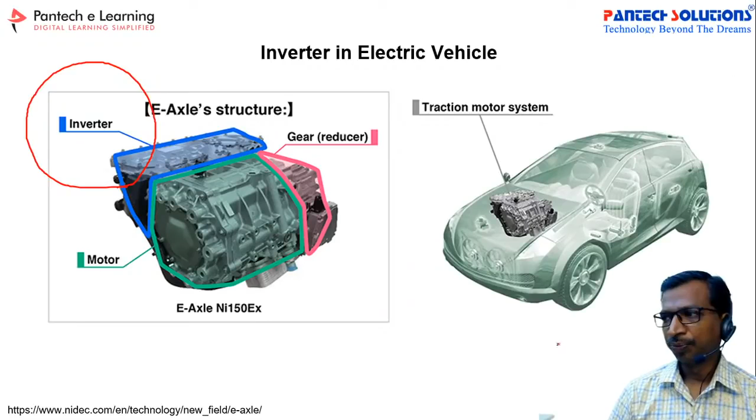Now let us move to the types. So what is an inverter? Do you have any idea about the answer? Inverter is a power electronic device to convert from DC to AC. Battery supply is a DC supply, and we need the output as AC, so that's why we use this DC to AC device - it's called an inverter.

For the inverter we will use MOSFET or IGBT devices. In this model, the entire circuit will use components like a MOSFET or IGBT.

So these two devices are the common devices which we are using in the inverter topology, and this is the ready-made device which is available on the market. Simply you can use it for conversion of DC to AC. If your input is 24 voltage DC and output is 230 voltage, then simply you can buy this inverter and use it. But as a researcher, you should know what is happening inside this device. So that is our main agenda of today's topic.

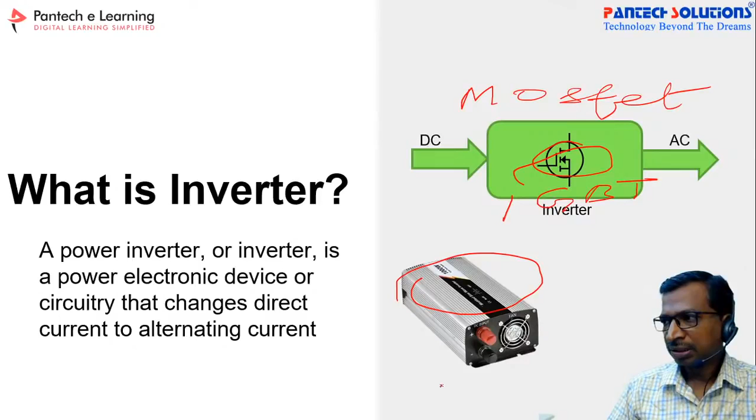Generally the logic will be programmed in a microcontroller. For this inverter, the main input we can call the DC bus voltage, which we get from the high power battery. The output, the desired voltage, is generated with the help of the microcontroller by the inverter module, and that voltage will be applied to the motor. So the motor will rotate under specific conditions. This is the main application of the inverter in our electric vehicle systems.

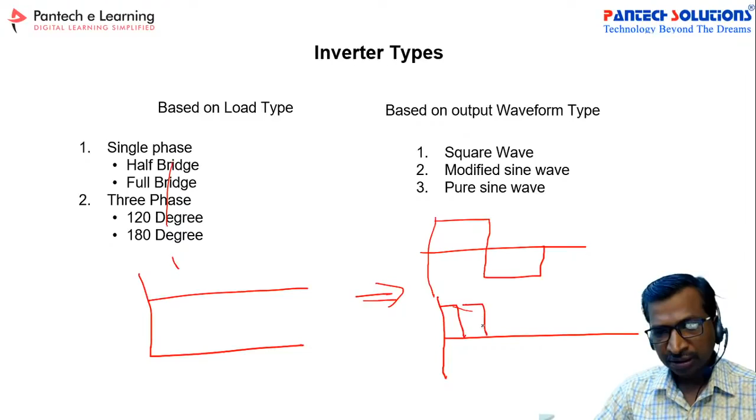So here we have to construct a sine pulse width modulated PWM model, converting from this square function. The pulse width will be based on the sine amplitude. Actually in the middle portion of the sine wave, the pulse width will be high, and for the corner side the pulse width will be very less. So like that we have to get the lower side, that is the negative portion also.

So like that we can get the output from the inverter model. For a pure sine wave inverter, based on the sine samples we have to generate a PWM. We will show you the demonstration in the MATLAB demo, how we can generate this one. So this is the generalized types of inverter.

So let us take a single phase full bridge inverter. This is the DC bus voltage. Simply we can connect a battery voltage with V battery plus terminal and negative terminal. And 4 MOSFETs have been used: T1, T2, T3, T4.

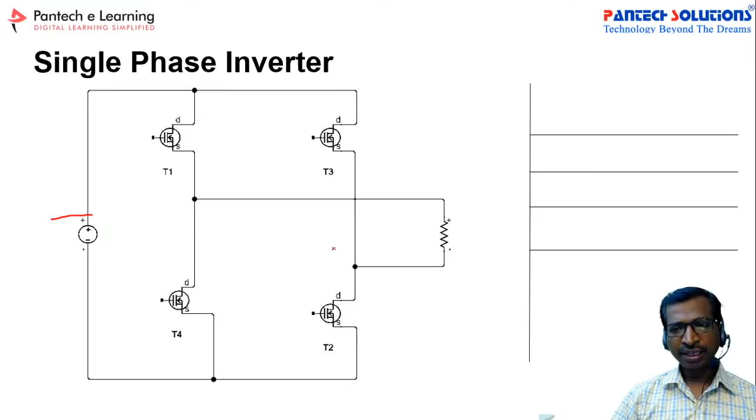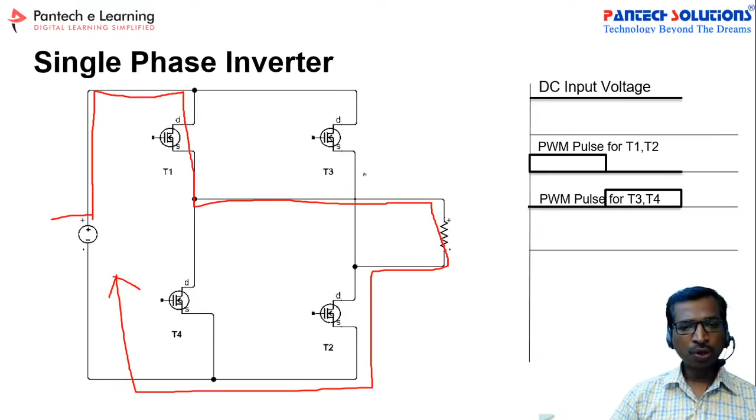The working principle of the inverter is, if you take the DC input voltage, we have to generate a PWM for T1 and T2 as a common pulse, and T3 and T4 as a common pulse. Suppose if you take T1 and T2, the battery voltage plus terminal is connected to T1 and the load, and T2 returns to the source. So this is one path, and the current flow may happen in this direction.

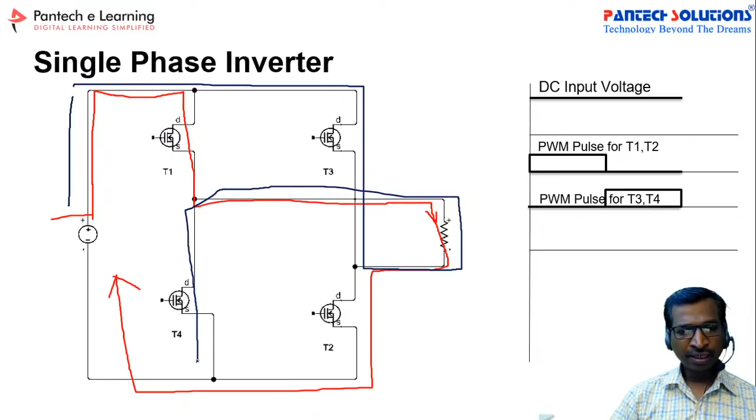Similarly, if you apply gate pulse for T3 and T4, the plus terminal will connect to the load via T3, and return to the negative via T4. So this is in the opposite direction. In that case there is no connection here. This terminal is connected to this limb, and this terminal is connected to this limb. So at this moment, the load voltage, see here the load voltage, this is V0.

So this V0 will always get a positive voltage for some time and then negative voltage for some time. See here, the output voltage will be like this. So even though we are applying a DC input, we can get a controlled output voltage of AC functions - positive voltage for some period and negative voltage for some period. This is the simplest working principle of the single phase inverter.

Now this is a three-phase inverter. To understand the working principle of the three-phase inverter, you must know what is the electrical degree, like 0 to 360 degree. In our AC voltage waveform analysis, we discussed what is 0 degree, what is 180 degree, and what is 360 degree. If you are clear about those degree conversions, then you can easily understand this concept too.

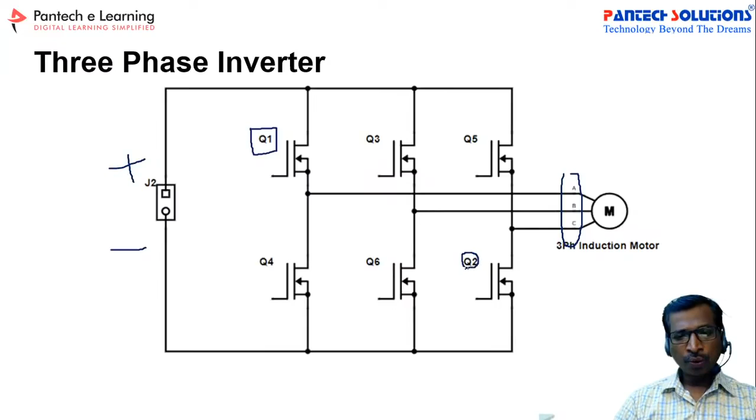If you take our inverter, the six switches are mentioned as Q1, Q2, Q3, Q4, Q5, Q6. See the numbering - if you have a clear idea about the numbering, you can easily understand the working principle of the inverter. So the first switch is Q1, the second switch is Q2, the third switch is Q3, and the fourth switch is Q4, which is for the bottom side of the A phase, and then Q5 and Q6. So we number it like this.

See here, if you take this one, you connect this one - so this is A phase, then B phase, then C phase. So just number it 1, 2, 3, 4, 5, and 6. This is the numbering of the MOSFETs or IGBTs, whatever it may be. If you give this numbering, then you can easily understand the working principle of the inverter. Just keep this in mind - this is the positive and the negative.

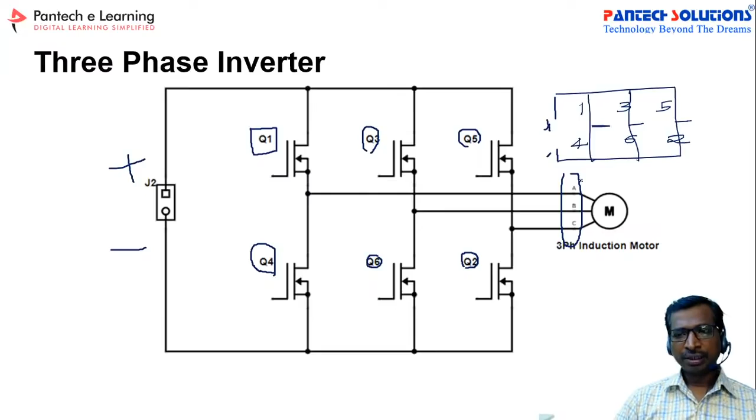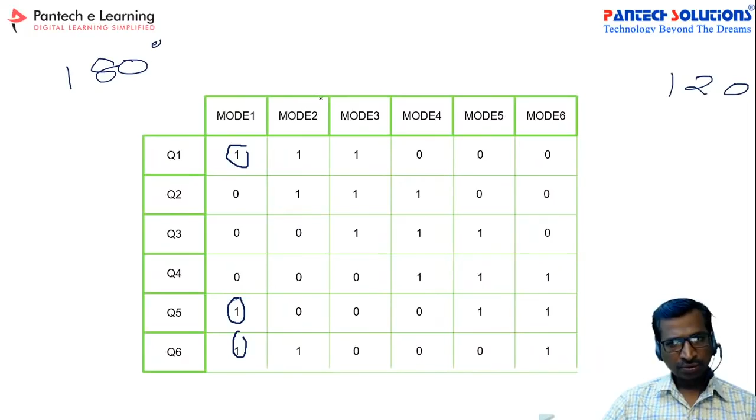Accordingly, during mode 1, Q1 we have to enable, Q5 we have to enable, and Q6 we have to enable. Since this is the 180-degree mode of conduction. For 120-degree mode, either we have to choose any two devices. In that case we have to remove the fifth one, and then turn on sixth and first. Let us consider only the 180-degree mode.

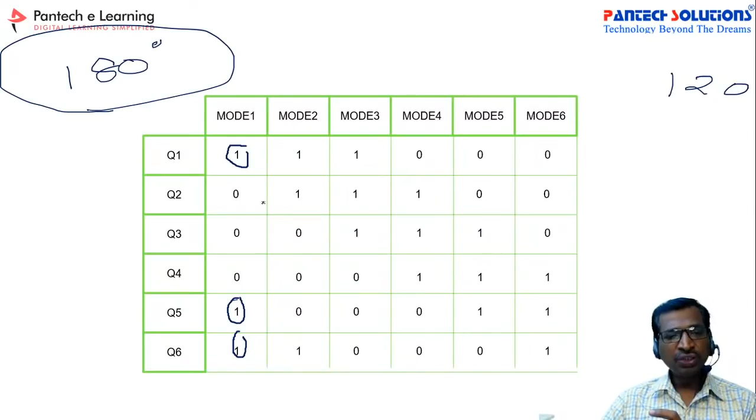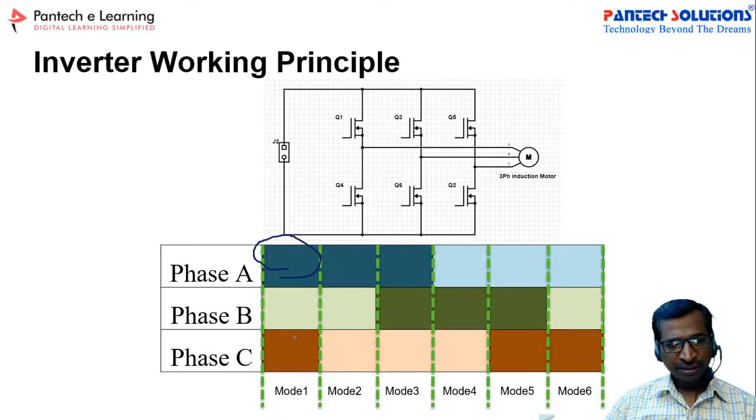If you generate this switching pattern, then you can easily achieve the desired output voltage. So now the point is how we can generate the switching pattern for each and every MOSFET. For that we have to use the pulse generator block to generate square pulses.

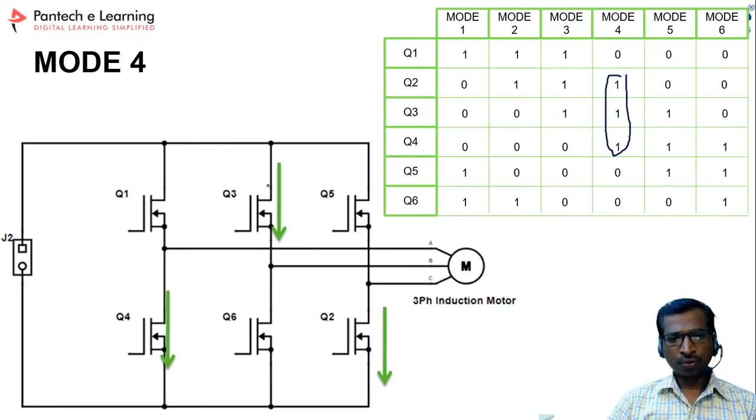In mode 2, switches 1, 2, and 6 will be turned on, and similarly mode 3, and for mode 4, switches 2, 3, 4. Like that we can turn on. If you generate this voltage, then we can get an output.

How will the voltage be calculated? For example, for mode 1 we are going to turn on 5, 6, and 1. So if you take this mode: first MOSFET, then sixth MOSFET, then fifth MOSFET. These three switches are going to be on the turn-on side.

See here, if you take this graph VDC, and Q1 and Q5 has been connected. Q1 resistance and Q5 resistance, and the negative voltage is connected to the individual resistance. All resistance is connected to the negative port, so this is the neutral point. This is VAN, and for Q5 this is VCN and this is VBN.

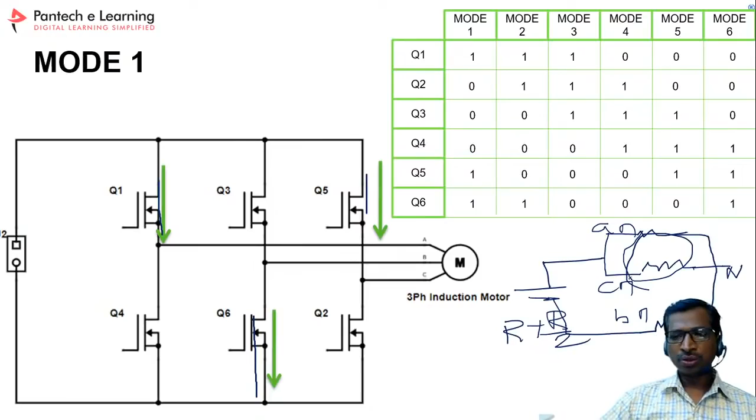So if you calculate this total resistance, the R equivalent will be R plus R by 2. If you sum these two resistances, then you may get R by 2, and this is the total R, equivalent R. If you sum this entire resistance, you can get the R equivalent value. Now you have to take calculations.

Just take this graph: here VAN, VBN, and VCN. Like that you have to calculate it. Here R plus R by 2, so 3R by 2 — this is the R equivalent. Now you have to calculate the current I1, so Vs divided by R equivalent, during this period 2Vs divided by 3R. Suppose if you calculate the voltage AN, to find the voltage between these two points, it is I1 into R divided by 2.

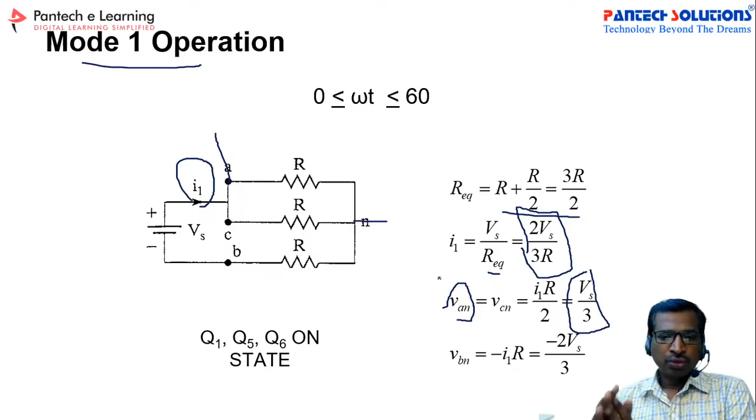So in that case, we know the I1 value is 2Vs divided by 3R, so this is called Vs by 3. Similarly, you have to calculate all these 6 intervals. If you apply this, you can get square pulses, so that will be the trapezoidal voltage.

So like this, you may get output voltage. Now the time is how we can generate this voltage. So let us move to the MATLAB.

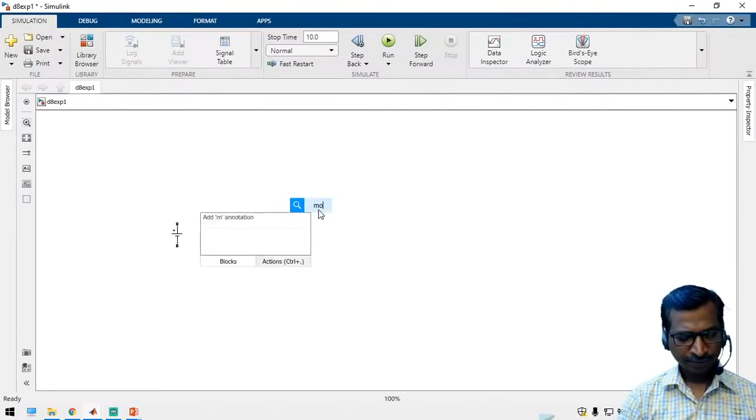Now take a MOSFET, and remove the measurement block for simplicity purpose. Remove the measurement block, rotate the component. For rotating the component, take control R.

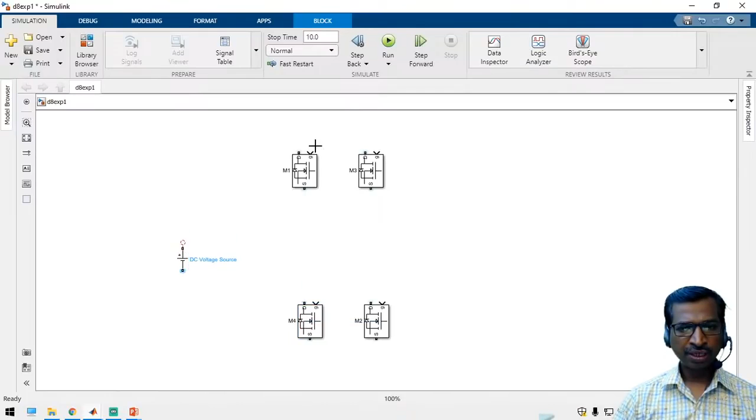So this is MOSFET 1, let us name it, and this is MOSFET 2, and this is MOSFET 3 and MOSFET 4. So this is the 4 MOSFETs we are going to use in our circuit. Just connect them as per the circuit diagram.

Now we are going to connect a load. If you have a load value, suppose if you are going to design a 1 kVA inverter, in that case you can choose load, RLC series load. So just take a series load.

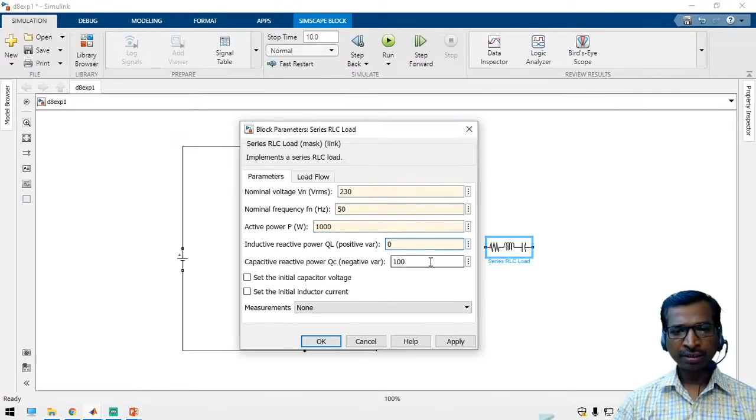Type the nominal voltage as 230 voltage, and the nominal frequency is about 50 hertz, and then active power here you can mention 1 kilowatt, like 1000 wattage, and then here you can apply the inductive and capacitive power. So just remove that one.

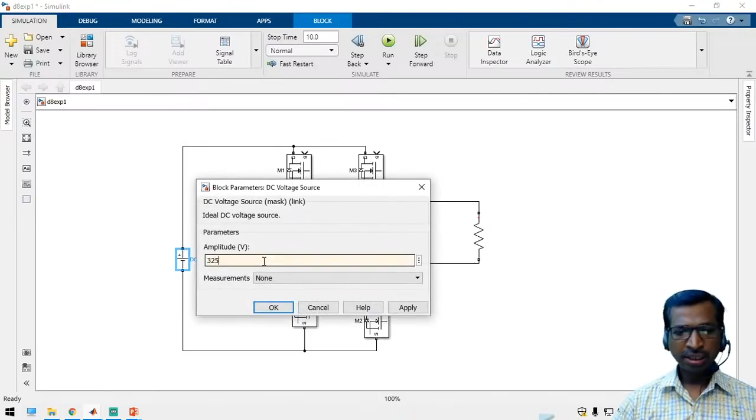So now we are going to power load our inverter for 1 kilowatt. Just apply 325 voltage as the DC bus voltage, or you can apply 350 voltage. Now we have to generate a pulse width modulation.

So take a pulse generator block, take a pulse generator block. See, the pulse generator is, see here.

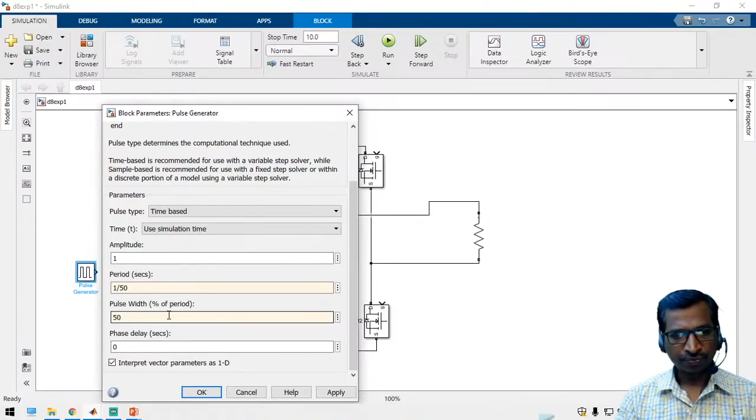So for the first pulse generator, set period to 1 by 50 seconds, and then 50 percentage. For the MOSFET's entire turn-on period you have to apply a pulse. Whenever you remove the pulse, the MOSFET immediately will get turned off. So this is the pulse for MOSFET 1 and 2.

So just take a goto function and let us connect pulse 1 and 2. So just connect here, pulse 1 and 2. Just connect here.

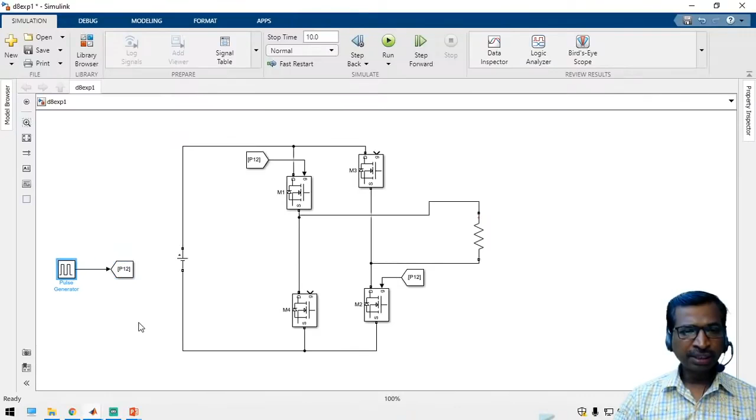The same pulse we are going to apply here, right? Similarly, you can invert the pulse and then apply it here. So just take a NOT gate, invert the same pulse and connect it here. So this is called P3 and 4.

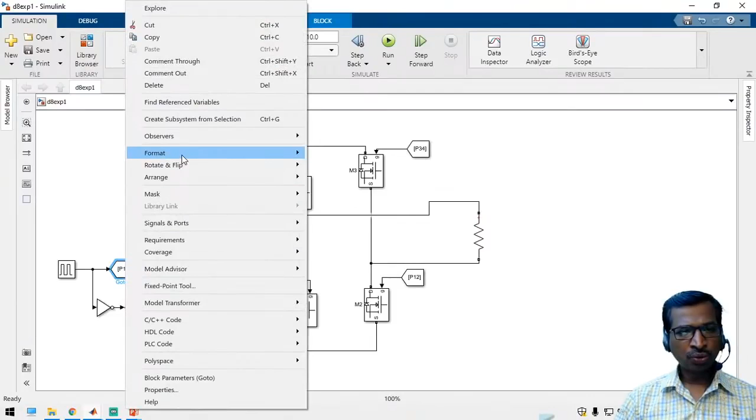Just save the simulation, and take the extract pulse. So this is the goto function, from function. Now I will show you the name also, the function name. I'm going to enable the name. For enabling or disabling the name, just go to format and then show block name. So now you can easily understand. So this is the goto function, this is the from function.

Yeah, so all are similar. So now this is the pulse generator block. Yes, this is the resistive load R0. So now we have connected everything, and we have to include the header file. So what is the name of the header file? Can you please comment in the comment box?

Practically, which component generates the PWM? A microcontroller is used to generate the pulse width modulation. See here, all the MOSFETs will connect according to that function.

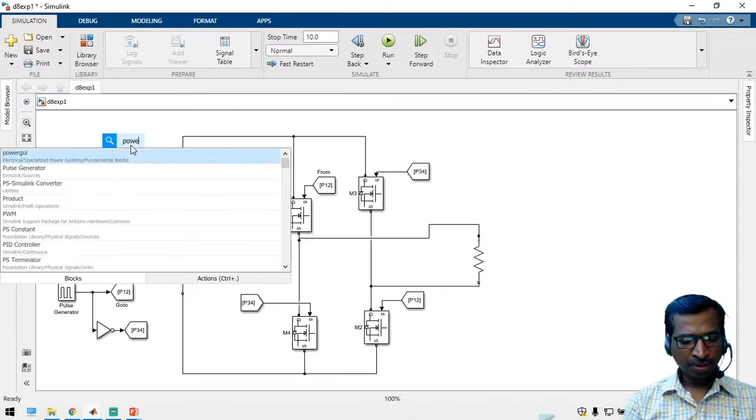Can you please comment what is the... yeah, correct, Mr. Sohim. Power GUI, we have to include it. So just search for power GUI. Just change from continuous to discrete to get accurate results.

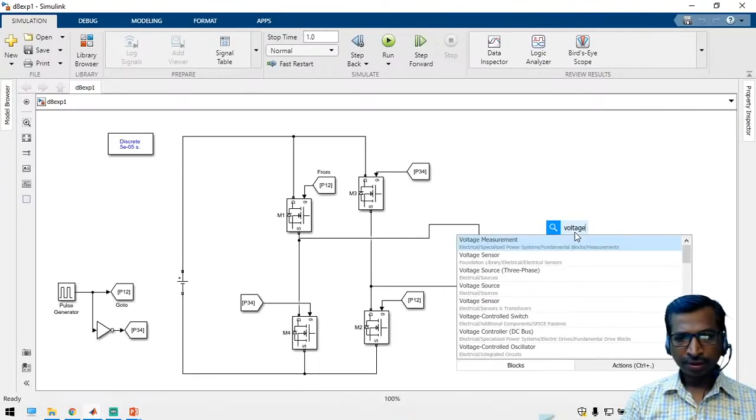So now we have to run the simulation for 1 second. And again we have to add the measurement block. So just take a scope, voltage measurement, connect across the load, and similarly you can also take a current measurement.

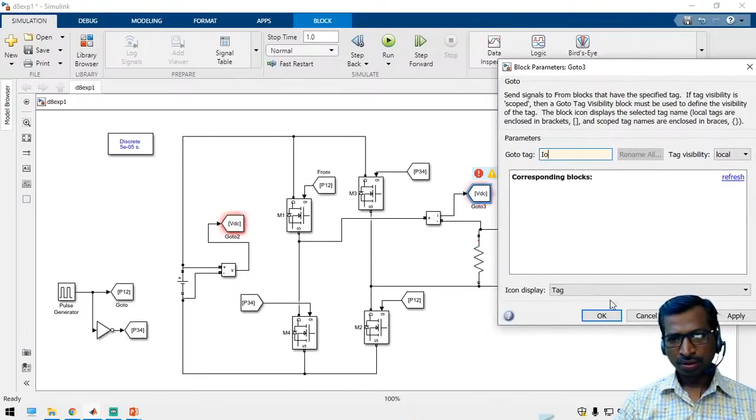And take a current measurement. Similarly, input voltage measurement also we have to take. So this is the input voltage measurement, and just take one more block. This is input VDC, VDC input, and I naught. This is I naught, and another one, this is V naught.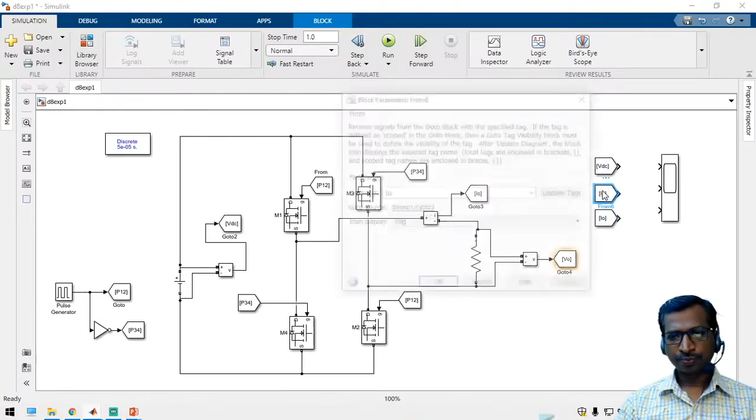So now everything we have connected. So take a scope block, make it 3 parameters we are going to measure. So just take a from block, first one VDC input, VDC, and this is I naught, and V naught also. So this is V naught. Like that we can connect, and now we are going to see the output of these 3 parameters.

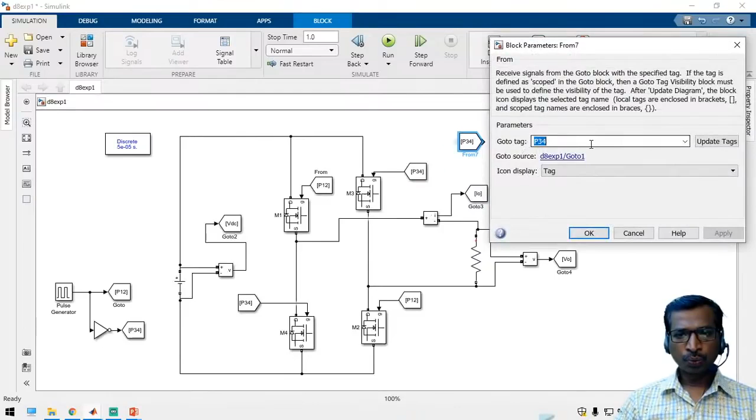And similarly we can connect, we have to measure the signals, that is the PWM signals also. See here, just take P1 and 2, P1 and 2, and P1 and 2. Okay, let us take another one, P3, 4, and V naught also. Just take another graph.

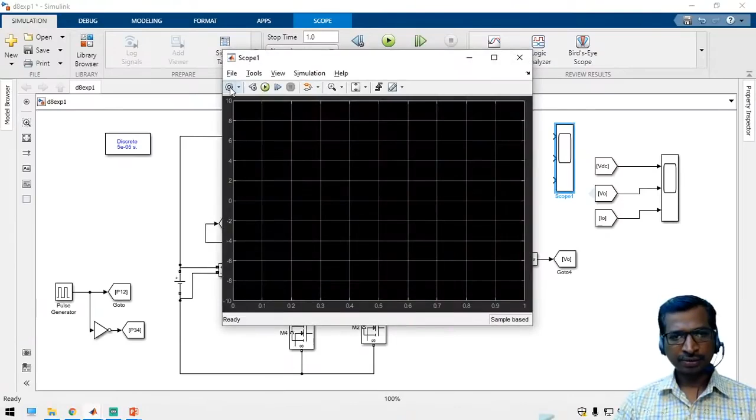So input voltage, pulse width modulation, and then output voltage. So here the input voltage, output voltage, and then current. So like that, if you analyze the graph, then you can easily understand the concept. So take a VDC input, VDC, 2 pulses, and then output voltage. So now we have configured all the block sets.

So now we have configured all the block sets, and just run the simulation. Let us wait and see how this turns out. Just run the simulation. Yeah, so it's initializing. Yeah, now it is over.

So now let us check the output. Open this graph, change the layout. See here, we are applying 0 to 325 voltage, sorry, this is the input voltage, called the input bus voltage, and this is the pulse width modulations. See the pulse width input: first pulse is for MOSFET 1 and 2, and the second pulse is for MOSFET 3 and 4, and we are deriving the second pulse from the first one, right? So this is the first one and this is the second one, and similarly we are getting the output: whenever the pulse is positive for 1 and 2, we get positive voltage, and when the pulse is positive for 3 and 4, we get negative voltage.

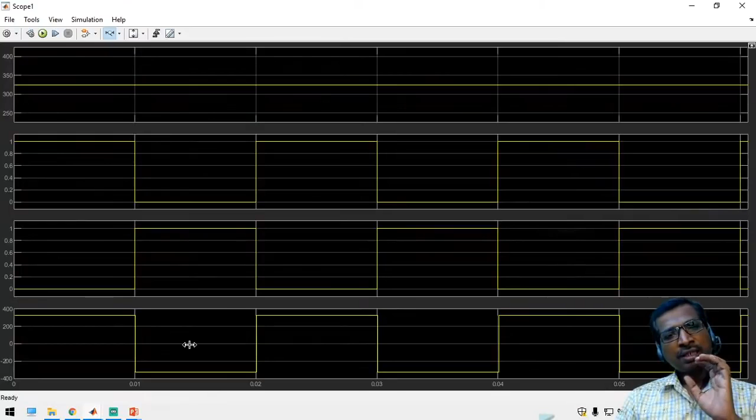So like this you have to construct a single phase inverter. And suppose if you know the sine pulse width modulation, just take a sine pulse, sine wave generator.

And take a repeating sequence, so that you can generate a triangular function. For the repeating sequence, assign time values 0, 0.25, 0.5, 0.75, and 1, divided into the time period. Or else you can keep it 5 kilohertz switching frequency, so 1 divided by 5 kilohertz.

And then the time period here is 0, 1, 0, minus 1, 0. Suppose if you want to understand this repeating sequence, please refer to the day one or day two class, detailed information is available there.

So the time period is assigned, and then the sine wave. So sine wave 2 star pi star 50 hertz. Other than this, no need to configure.

Change the solver procedure, change to fixed step. By default it will be variable step, so just keep it fixed step.

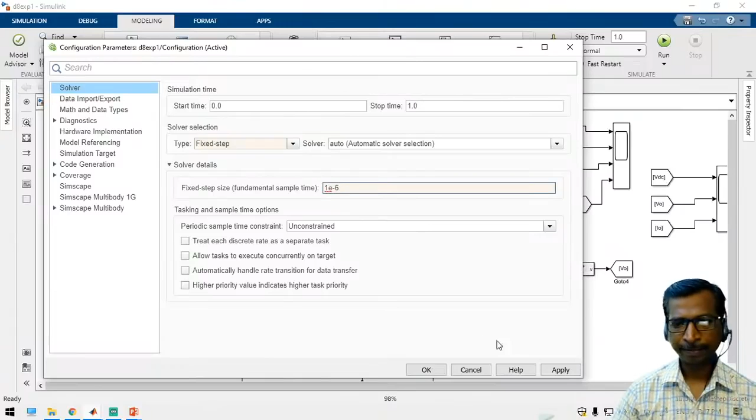Next you have to change the solver details. Open the solver details and modify to 1e power minus 6. If you apply this, you may get a proper sine waveform, otherwise the block will generate random signals.

So now we are going to connect. Take a relational operator to compare the value, connect it and change the logic. So just connect this one. Now you have developed the sine pulse width modulator.

Sine pulse width modulation. See here, the same output, but the output voltage will not be a square pulse, it will be a sine function.

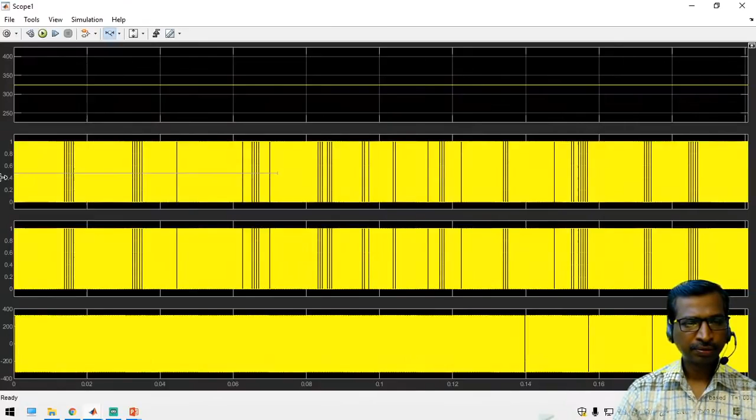Just increase the value, zoom the graph. See here the output, this is the output voltage. The output voltage will have a maximum pulse width, and similarly this is for the negative maximum pulse width. So like that we can change the firing angle.

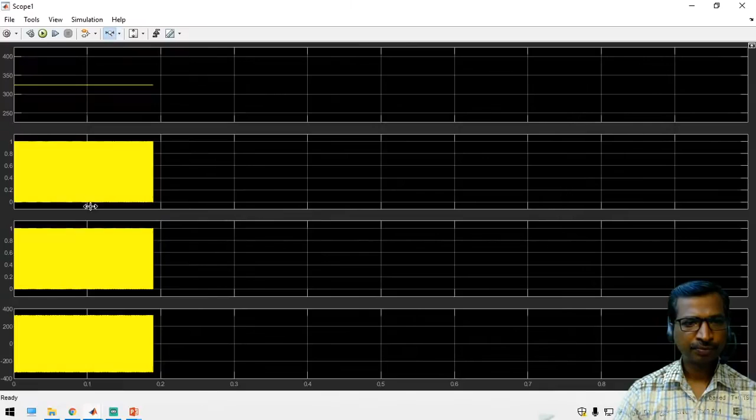See here, if you change the amplitude, instead of 0.1 you can keep it 0.8, then you can get more accuracy. Now you can get an easy view.

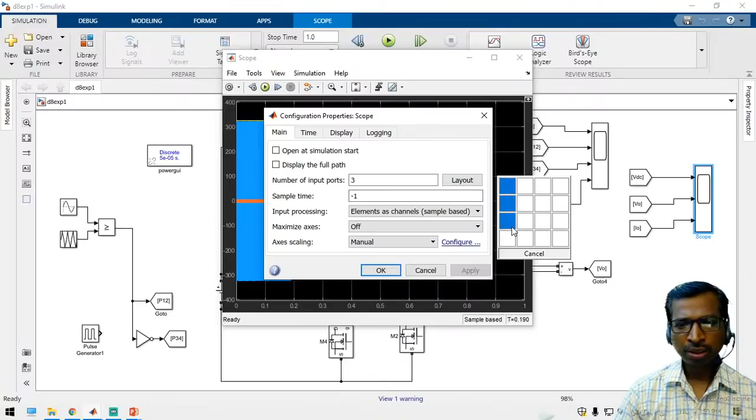See here, why we should use a sine pulse width modulation - let us take this graph, input and then output voltage, and then output current. See here, both are in the pulsed form.

Suppose since it's a resistive load, the current also shows that it rotates from positive to negative. But the average voltage, on the AC side, the RMS voltage will be a pure sine waveform.

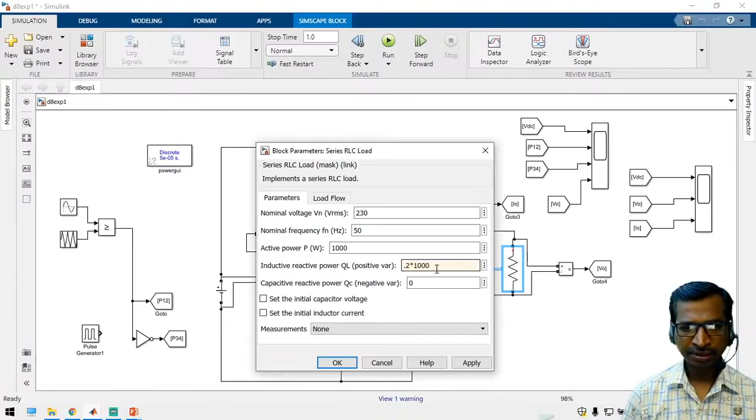Now if you increase the resistive load, generally the inductive reactive power will be maximum 20% of the active power. So in that case, 0.2 into 1000, this is called 20% of the active power. Just apply this inductive reactive power.

Now the situation is we have added the inductive load. See here, now the current waveform, this is the current function. By default this current function will move toward the sine function.

Since it's a sine pulse width modulation, we have to add a filter module to achieve a pure sine output voltage as well as sine output current. Without the filter, the voltage will not vary, but the current will get changed.

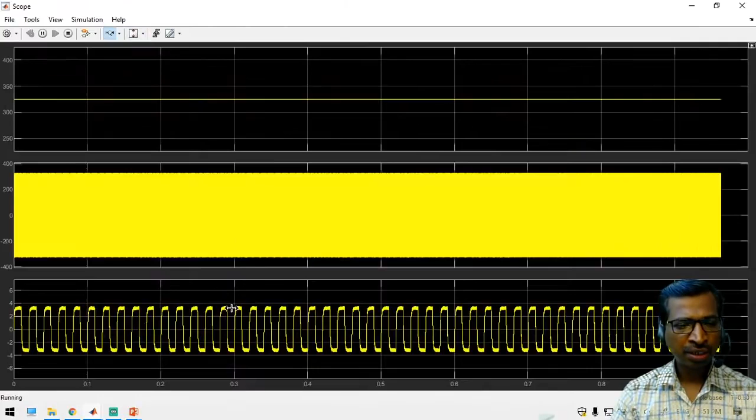See here, earlier the current was a pulsated waveform, but now the current waveform has been varied. So like this, the current function may vary, but in the square function you cannot get this. See here, this is the sine pulse width modulation.

Suppose if you are applying the square function, what will it be? If you are changing the pulse and analyzing the output current for the same scenario, see here the current function is more of a square waveform.

While you apply a sine pulse width modulation, it's somehow an improved one. If you calculate the firing angles for the filter models, to improve the sine function you have to add an EMI filter to achieve a pure sine output voltage and output current. Like that, you can implement a single phase sine pulse width modulation.

Similarly, we can generate a square pulse also, and we can develop a three-phase function also. So for the three-phase inverter, again we have to use the same logic. Let us check one by one.

Now we have to generate three functions, so just remove three phases. I'm going to change this one to three phase PWM. So remove this one and include another leg, another leg.

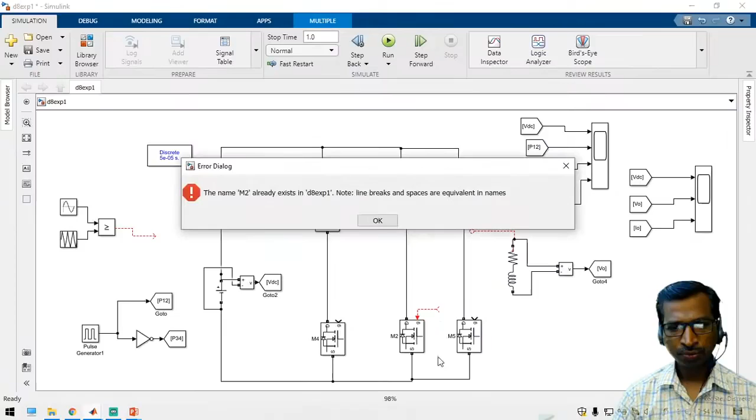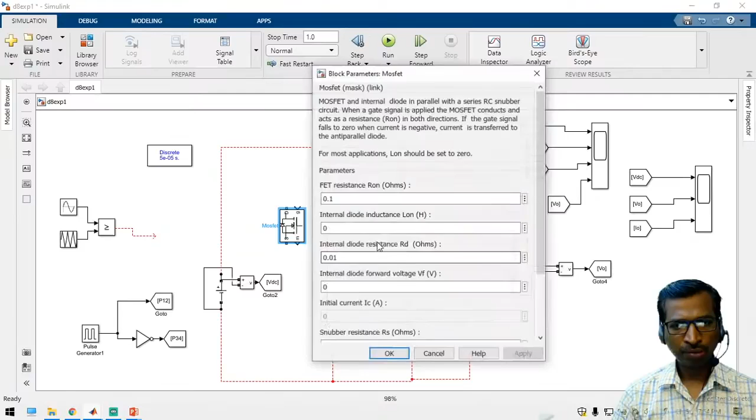Now we have to generate pulses. See here, M1, this is M2. Let us delete one and recreate it so we can easily develop a block. Take a MOSFET, rotate the component, remove the measurement port, and this is M1. So just connect accordingly.

MOSFET 1, and this is MOSFET 2, and MOSFET 3, MOSFET 4, and MOSFET 5, and MOSFET 6. Okay, so this is the switching pattern, the inverter structure. Now we have to generate square pulses, PWM pulses.

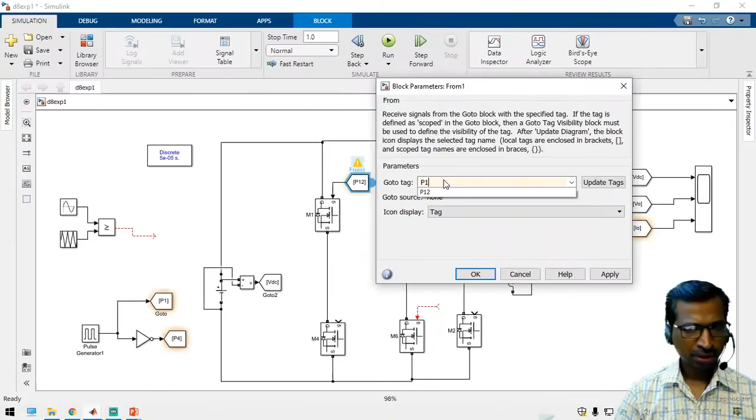See here, this is P1, and so this is P4 pulse. See here, so this is P1, M1, and then M2. For M1, the pulse is P1, and for M4, the pulse is P4. Now just take a from block, rotate it. So this is P1, and this is P4. The inverted pulse will be P4.

Similarly, now we have to generate a pulse for phase B. So let's take this as phase A, and let us generate phase B. For phase B, just copy the same one, and for phase B this is P3 and this is P6. Here this pulse should be 120 degrees apart from pulse 1, phase 1. So how can we generate 120 degrees? See, 120 into 1 divided by 50 divided by 360. This is the simple calculation to generate 120 degrees.

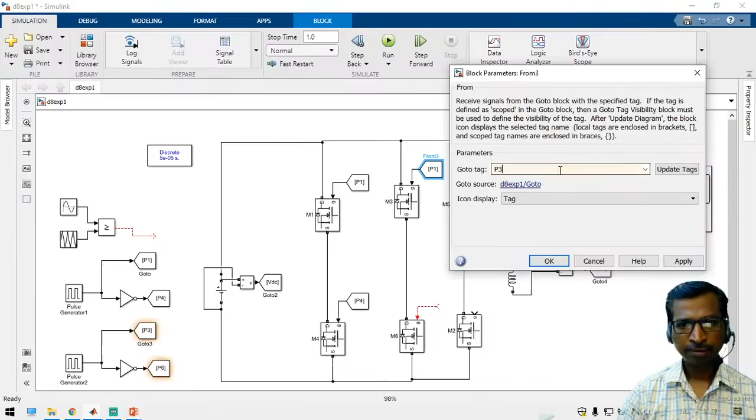And P3 and then P6. So just name the variables. This is P3, and P6. This is P6, right? And similarly we have to connect the load also.

Let us check one by one. Just remove it, rotate the component. Let us take a pure resistive, then we can go for the inductive. For A phase, take a B phase and C phase.

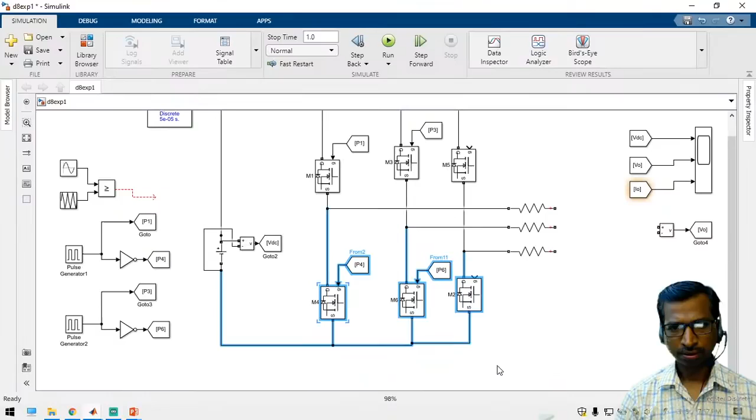So just take this one, and this is the neutral point. Okay, so this is the neutral point. Now we have to generate phase C also, and here we have to modify this one. This is 120 degrees and 240 degrees.

So C phase will be 240 from phase 1. Okay, so 240 from phase 1, and now you have to change it. This is the phase P5 and P2. And again just connect here, this is P5 and P2. So P2. Now all these 6 pulse width PWMs have been applied.

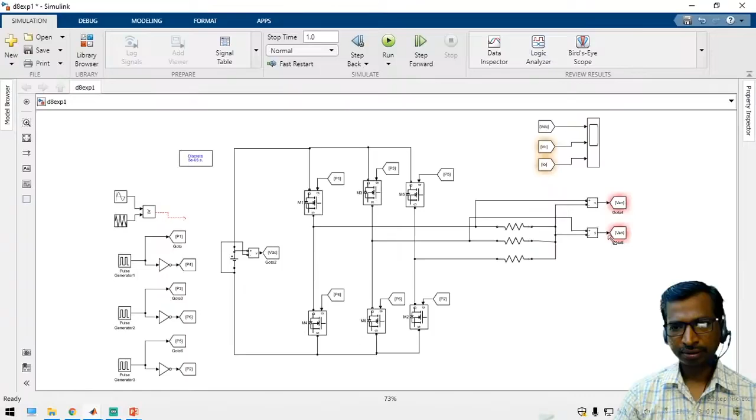Now we have to connect a voltage measurement block. So just change here. Now we are going to connect A phase and then neutral. Let us name it VAN. So this is VBN, VB voltage, and then neutral point. So this is VBN, and VCN. So VCN, this is C and then neutral point.

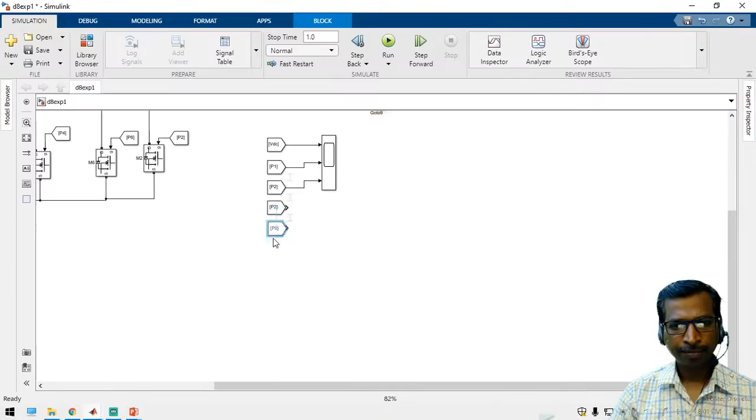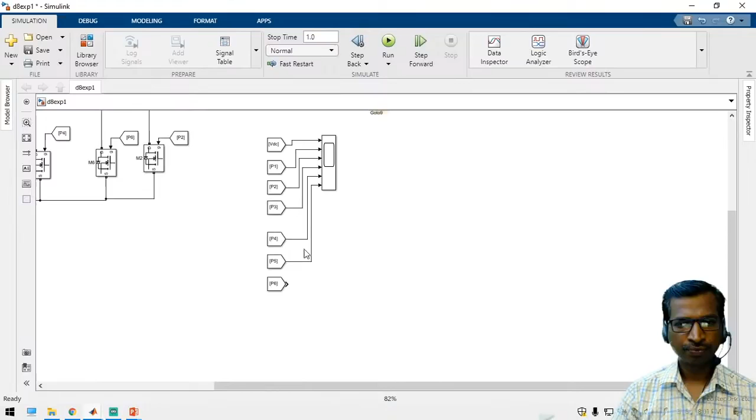Now we have to measure the pulses. So just take this one. Six pulses, let us check: P1, P1, and P2, P2, and P3, P4, P5, P6, P3, and P4, and P5, P5, and P6. P4, P4, 5, and 6. So let us take all the graphs.

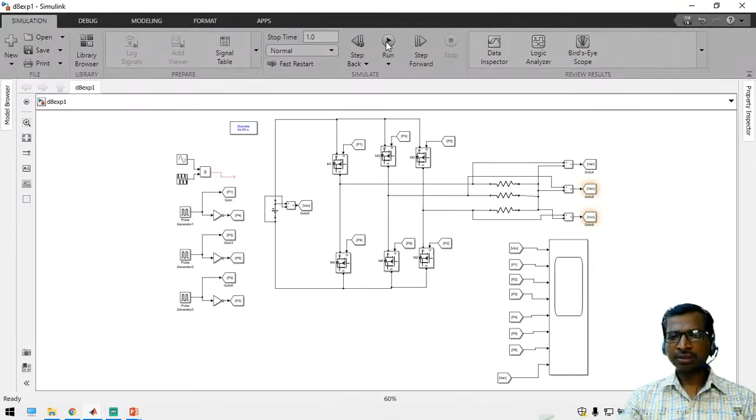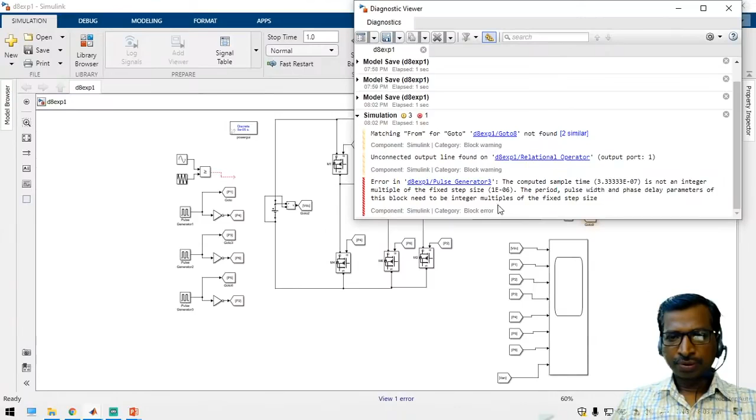Error, pulse generator block: sample time is not integer. Fixed step time, just to change the parameter. So just remove this block, and sometimes that previous header data will be stored in the data history, so just change it.

It's not an issue. If you clear the workspace data, then you can get it. So now we have run the simulation.

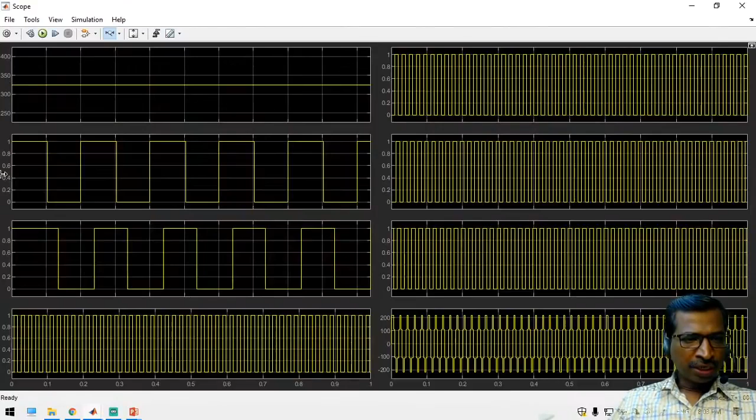See here, input voltage we have applied, and if you zoom the graph, each and every signal has been phase shifted by 60 degrees. This is the output voltage of VAN, and this is the PWM first pulse, then second pulse, then third pulse. From this, again it will be shifted by 60 degrees, and then again 60 degrees, and then again 60 degrees. If you combine all these things, each and every phase pulse will have a 60 degree phase difference.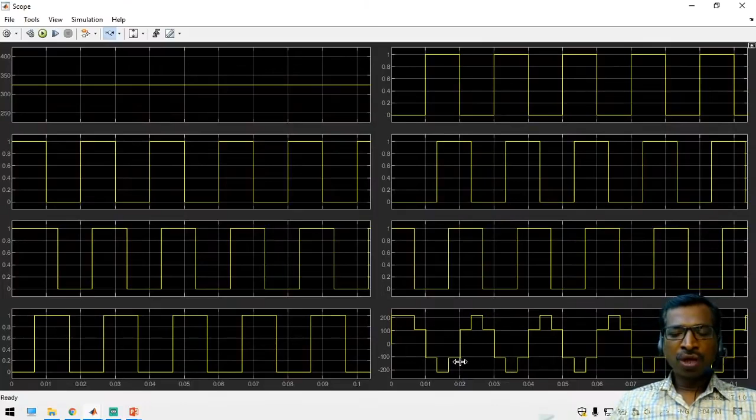So if you apply this, then you can generate a 180-degree mode of conduction inverter output voltage. Now we can take another graph, just remove this input and then output. Take input as well as output. So let us measure input voltage, input voltage, input voltage, and then output voltage.

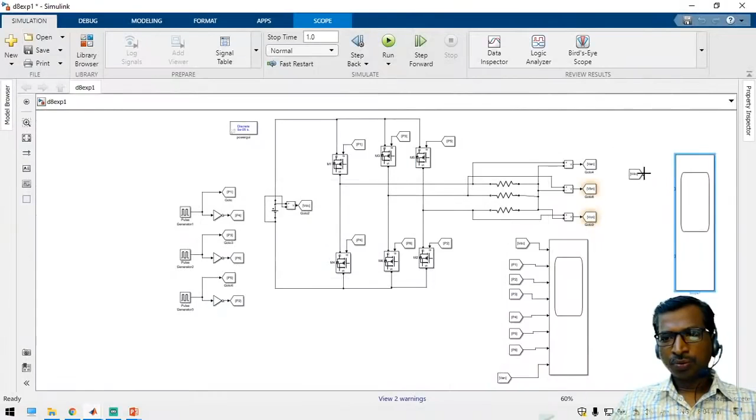So take a mux block to combine all these three inputs: V, VAN, VAN, VAN, and VBN, so that you can identify the phase displacement also. For the purpose, we have to use VBN and VCN. So this is VCN, just to connect, then now just run the simulation.

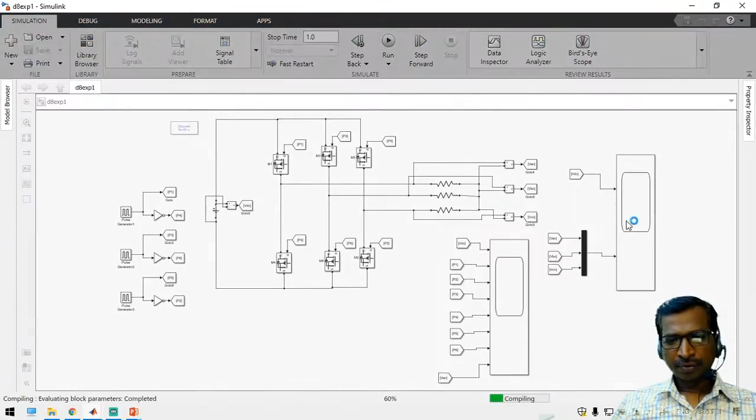See here, the input voltage as well as the output voltage. This is the phase shifted output voltage. So like this, we can generate signals. Is it clear? The three inverter output voltages have been generated. So this is 180-degree mode.

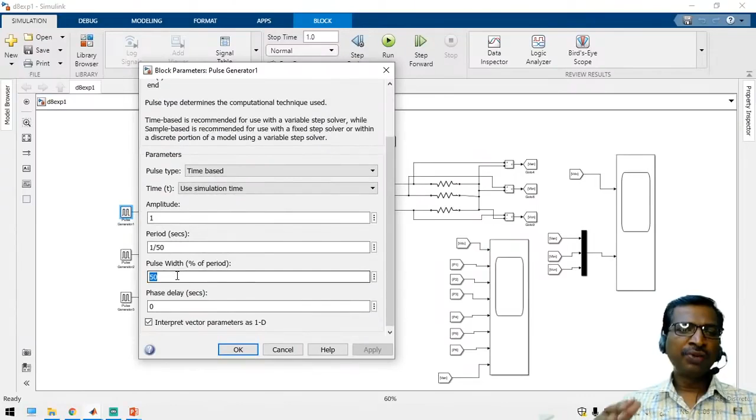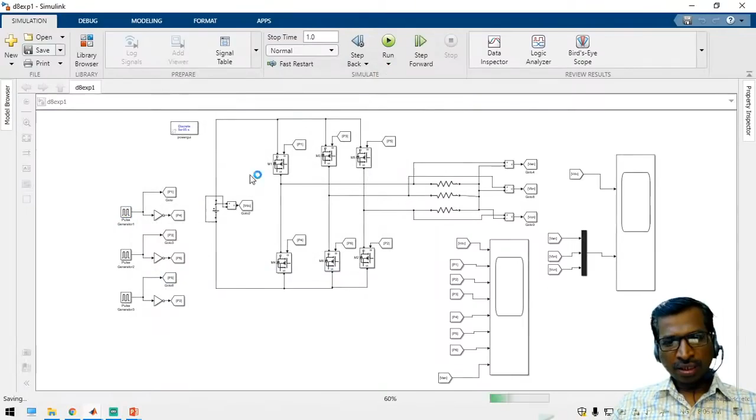I think you have understood the complete idea of the inverter pulse in three-phase inverter generation. So try to practice the same pattern and get the output. If you have any clarifications, you can comment in the comment box. Now you can get the output. Now you can ask your questions.

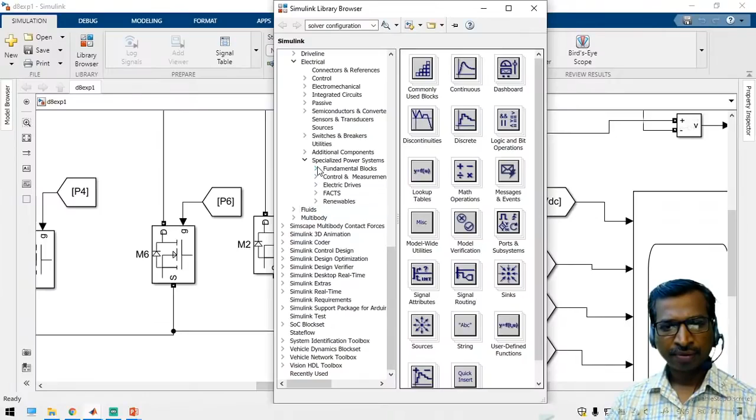MOSFET, you just search in the tool work area, you can get it. To identify the MOSFET, just go to MATLAB, open the library browser, go to Simscape, go to electrical, specialized power systems, and fundamental blocks, so power electronics. So here you can identify all the blocks.

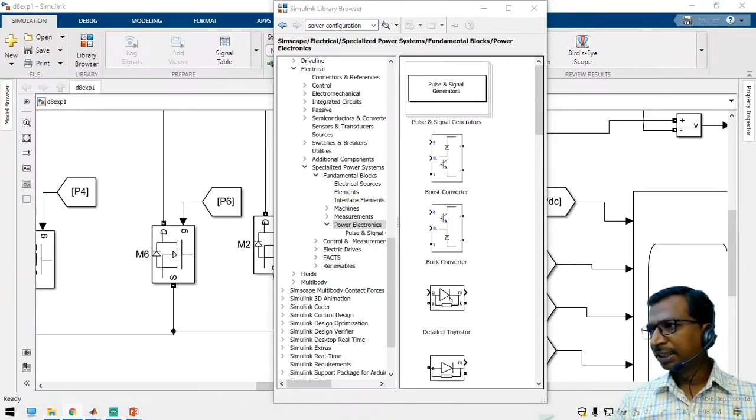Please tell 120-degree mode of conduction simulation. Actually, for the 120-degree mode of conduction, take this pulse 1, change to see here 120-degree mode, right? So 120 divided by 360 into 100%, this is the pulse width. And for P1 it's 0 degree, and for P2 calculate the same one, right?

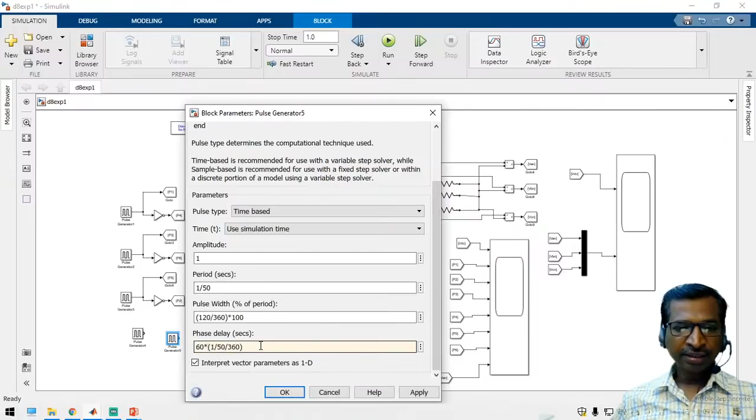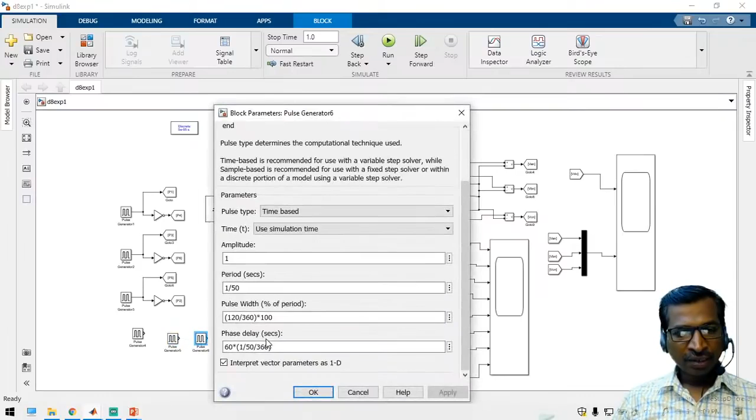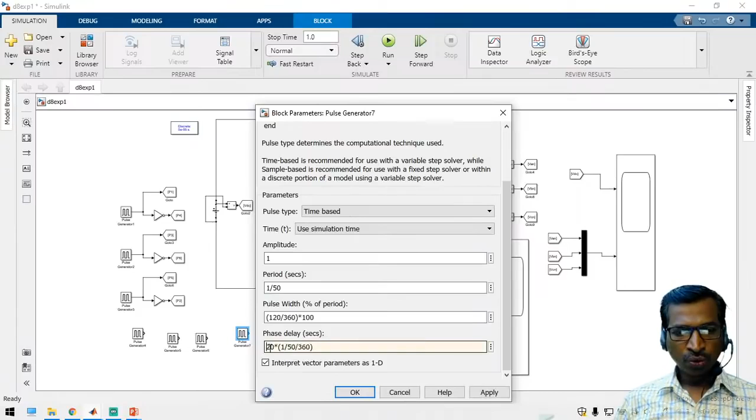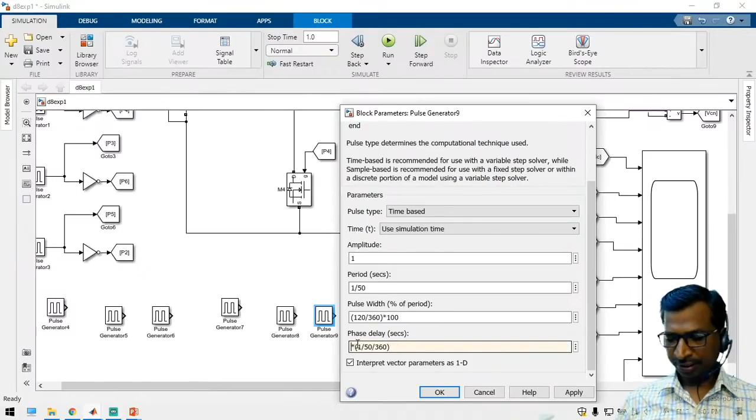So 1 divided by 50 divided by 360, this is the 1 degree time period, and 60 degree phase shift, 60 into the time value. So this is P1, sorry, P1 is 0 degree, P2 is 60 degree phase shift, and P3 here you have to apply 120 degree, and for P4 you have to apply plus additional 60, so 120 plus 60 is 180. And for P5, 180 plus 60 is 240, right? And P6, 240 plus 60 is 300. So like that you have to apply. So this is P1, P2, P3, P4, P5, P6. Simply you can apply, then you can generate a pulse width for the 120-degree mode.

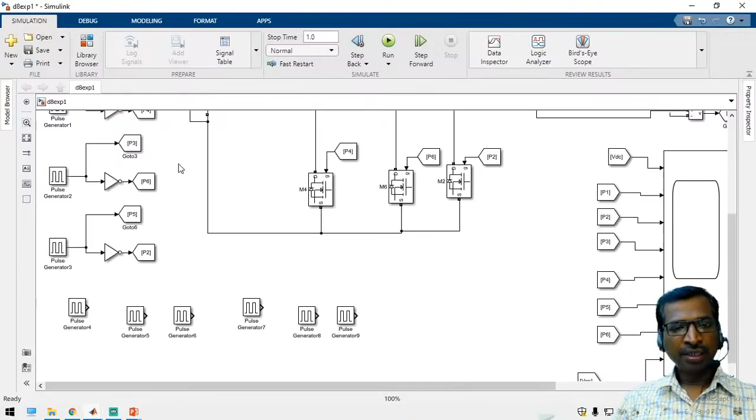Please show the comparison of sine and three phase. This is an assignment for you, YouTubers: the three phase, single phase sine pulse width modulation. You know single phase sine pulse width modulation, and you have to add to it. Similarly, you have to generate A phase, B phase, and C phase. The triangular repeating sequence is common, that is the carrier. So if you apply and compare the procedure, you can get a three phase sine pulse width modulation.